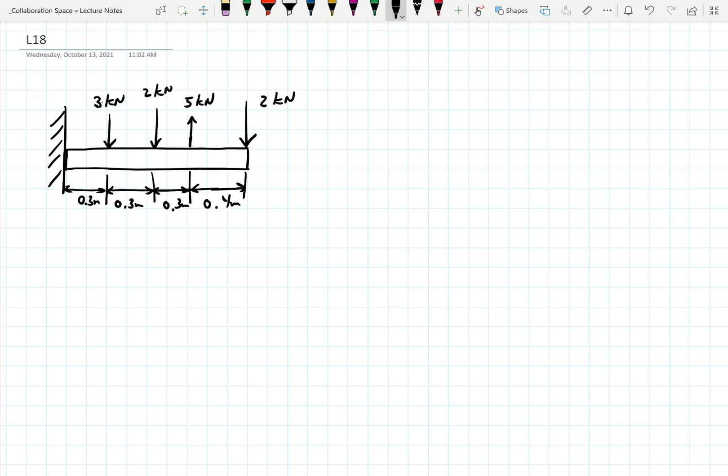Okay, we got A, C, D, E, and B. It's kind of a strange labeling system, but it's the way this particular problem laid out. When you do these in the real world, you can choose your lettering system, and I would always go left to right. Just A, B, C, D, E, and get to the end of it. Make sense? But we'll go with that.

But it is a good idea to put labels on this thing, because as we start doing these things, we come up with shear and bending moment diagrams. It's going to be interesting to keep track of all this stuff. Okay. All right, so that's the diagram for this. And what we want to do is draw

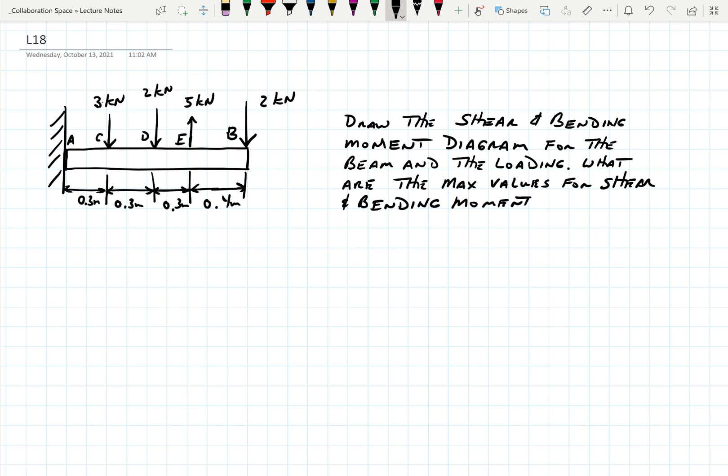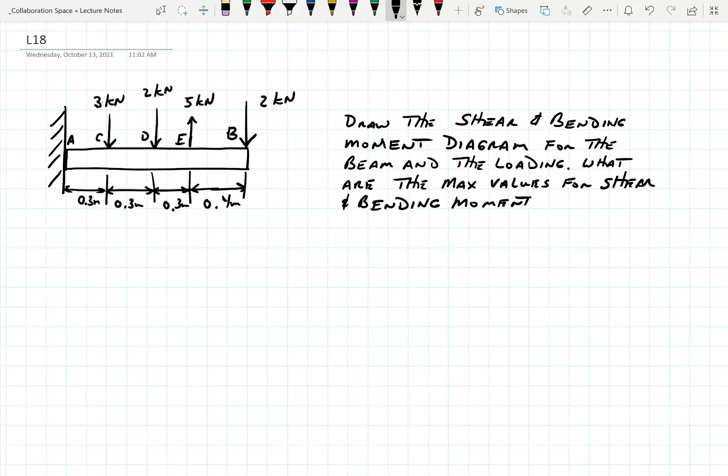Step number 1. What is it? Okay. So this is relatively simple from the standpoint of draw a line, put the forces in, okay? And what's next to this thing? We need a reaction here at A, don't we? Okay. So, FBD. Next thing is let's figure out what the reaction is, right?

And if I assume up is positive, that leaves me RA minus 3 kilonewtons minus 2 kilonewtons plus 5 kilonewtons minus 2 kilonewtons. Yes?

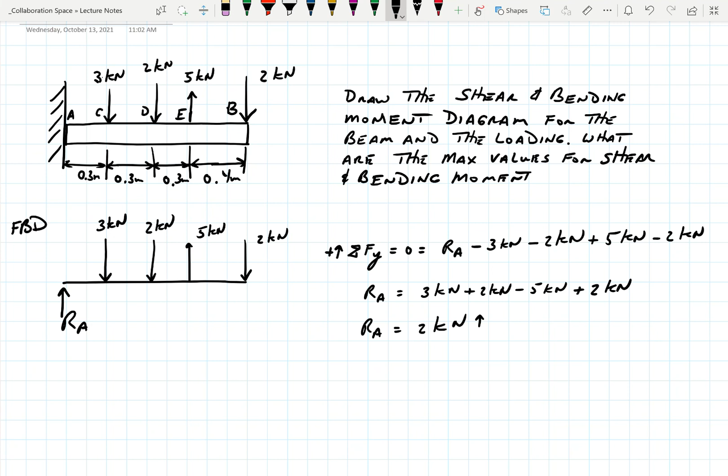All right. Now, there's one more piece to this that we need to figure out, and it's going to be how do we keep this thing from causing any other problems. We're going to need it down the road, and I can introduce it now or later. No, I think I'll introduce it later. We'll do it when we get down to the moment stuff. All right, so the next piece of this puzzle is

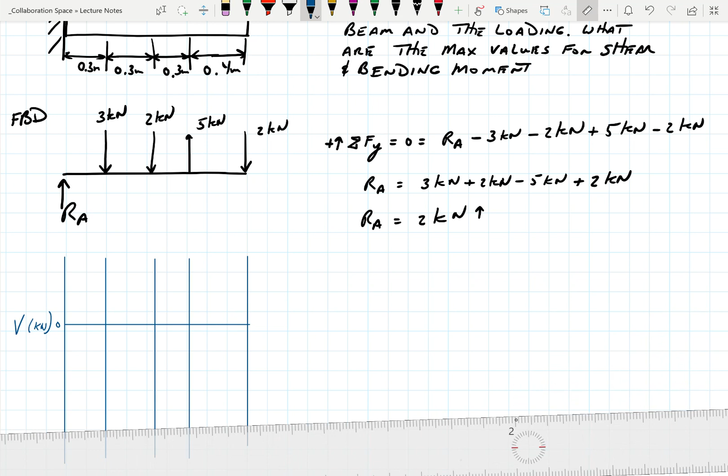oh, how big does this diagram turn out to be? We can live with it right about there. Okay. All right, so our shear and its units are kilonewtons. And that's 0, by the way. All right. Over to you for a minute. All right, so the shear section.

We're looking for the forces that are going to cut things off, okay? So really, the first thing for the shear here is V at A is equal to RA, right? Which is equal to 2 kilonewtons. And if I was smart, I would have drawn, let's do that again. Let's do the line at one of the regular lines here, and then we can actually have some fun with this. So we'll make that 1 kilonewton, we'll make that 2 kilonewtons. So the first thing I got to do is go up 2, right? All right.

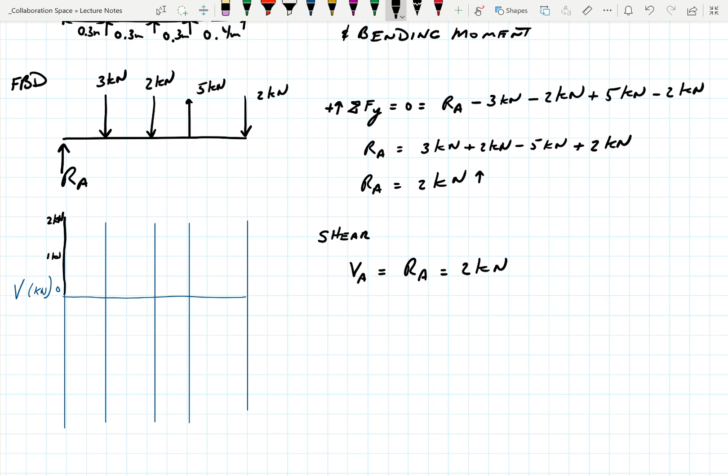So if I'm plotting the shear, that's the only force until I hit the one at, oh, it'd be nice to put the letters in there, wouldn't it? Just to make sure I used them right. A, C, D, E, and B. So the 2,000 newtons upward is steady all the way until what point? C, who said it? Don't be bashful. Is it just at C, just before C, or just after C? C. But I'm asking you to think about this. As it approaches C, what's it going to be just before C? Remember?

So it's actually going to shear at C, but up to C, just before it approaches there, it's still 2 kilonewtons, correct? Are you seeing that? If you don't understand that, what I'm going to draw in about 30 seconds is not going to help you. It's still 2,000 newtons all the way across this first 0.3 meters, okay? So it goes right there.

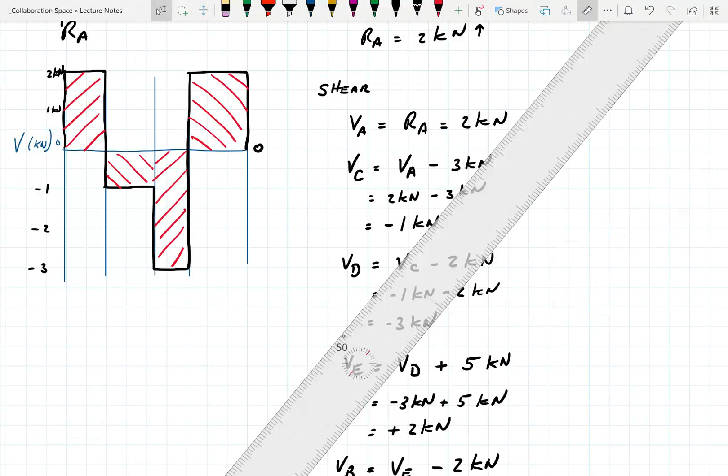All right, we're going to call that 0, and what am I going to do this in terms of? 0.2, 0.4, 0.6, 0.8. Negative 0.2, negative 0.4, negative 0.6, negative 0.8. All right, and you can choose whatever units you really want to play with there. All right, so now for the moment diagram.

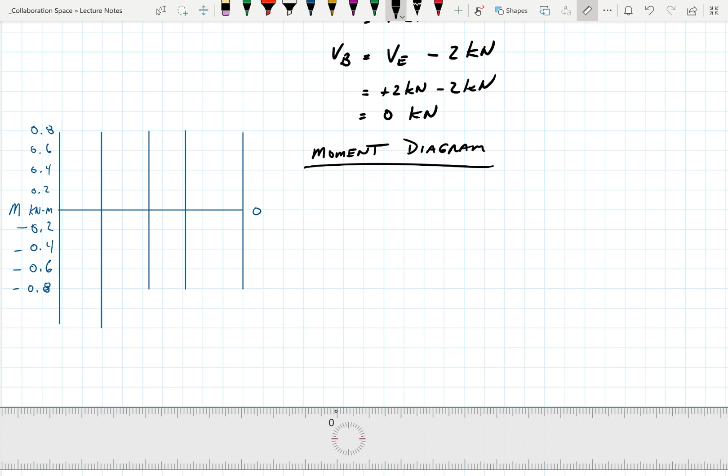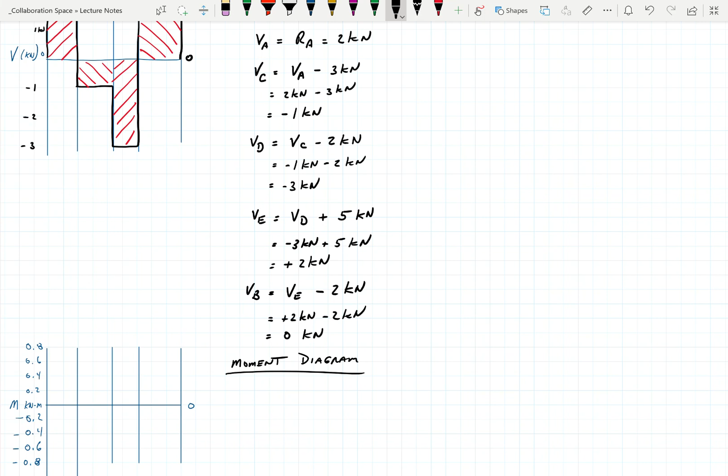Okay. And to do this, we kind of need the stuff from up here. And this is why the calculations tend to start going this way. The only other way I could do it on here was if I started running the moment equations over to the right here. But you're going to have to keep it somewhat on a page of paper. So put the diagram all on the first page, put all the equations on page 2, however you can make this sort out, okay? All right, so the area for the first one is really going to be 2 kilonewtons times 0.3, all right?

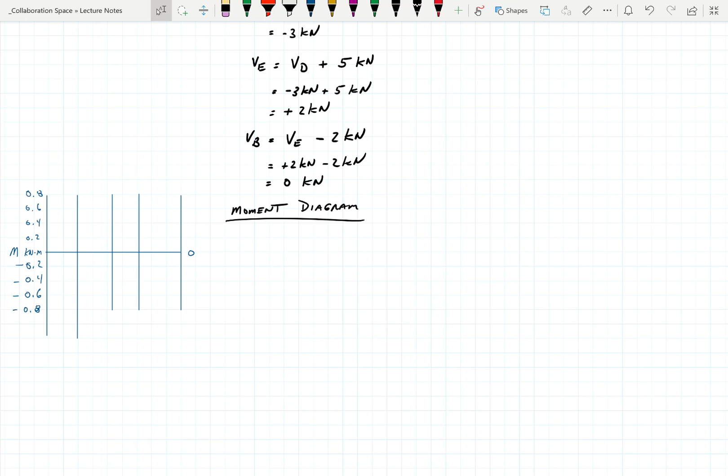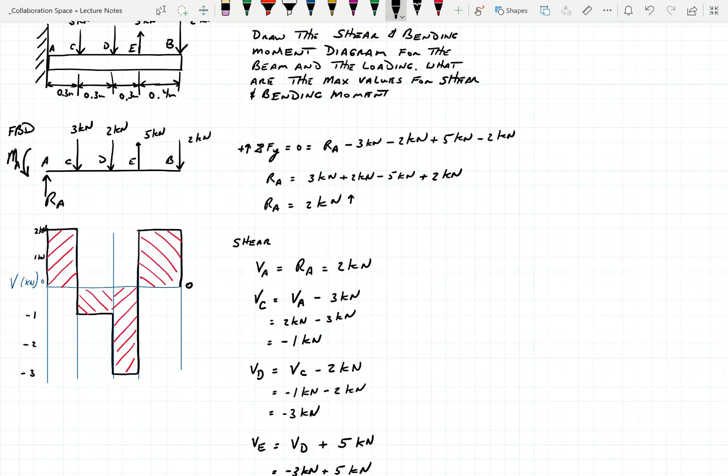Now, I've got to go back here. This is what I was going to introduce earlier. Let me slide all the way up to here. So that was my vertical sum of the forces reactions, okay? But in order to keep this thing in space properly, we need a reaction on this. That's this. Okay, so we need a moment at A that actually keeps this thing attached to the wall. Okay?

Now, strange concept to you, maybe? I'm hoping. What's that? Oh, you're using it so that we can actually figure out all the pieces and parts. So the free-body diagram up there is going to give us all the reactions that happen. Okay. Now, that beam in itself, if it was in outer space, will it stay level? He was shaking his head no, but I think we're heading in the same place.

But right now, just the beam itself, where'd my ruler go? If that thing is sitting there, okay, and it wasn't attached to the wall, would it just stay level with those forces? No. Okay, why not?

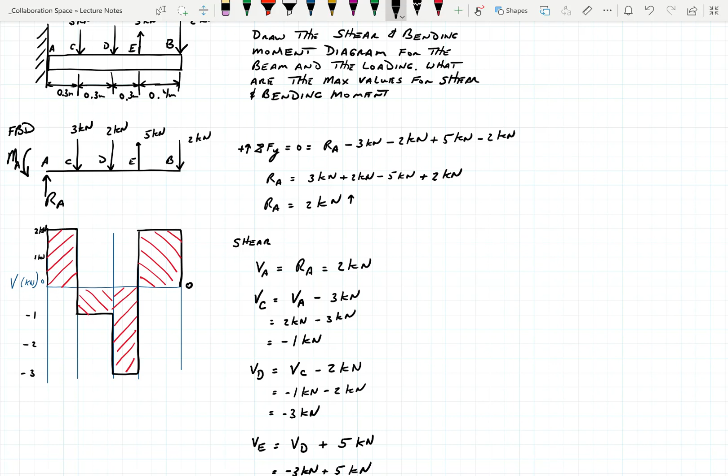Okay? We've got to come up with this moment out here first. Unlike a typical beam that we're using for like a bridge, there isn't one of those on a bridge because it's not doing anything to stay in that position. It can go this way or this way, and it all just sits there by weight. But we're going to hang this off the wall. I need something here. So I do have to figure out what MA is. So when I did the sum of the forces here, I really need to come over here and do sum of the moments.

In order to do that, do you remember that from statics? Yeah, okay. So we take our first one, our MA, and which way do I want to go? We'll make that positive, so it's counterclockwise. So MA, I drew it in that direction, so that's positive. But the force at C is 3 kilonewtons, and it's at 0.3 meters, okay? And I chose negative, why?

The force is going downward, but which way is it going to try and rotate? Counter or clockwise? It'll rotate clockwise. Okay, so that's a negative. 2 becomes a negative also because it's going to rotate there, but now we're at 0.6 meters. All right. And now we're at 5 at point E, and that's counterclockwise with the direction of moment. So that'll be 5 kilonewtons

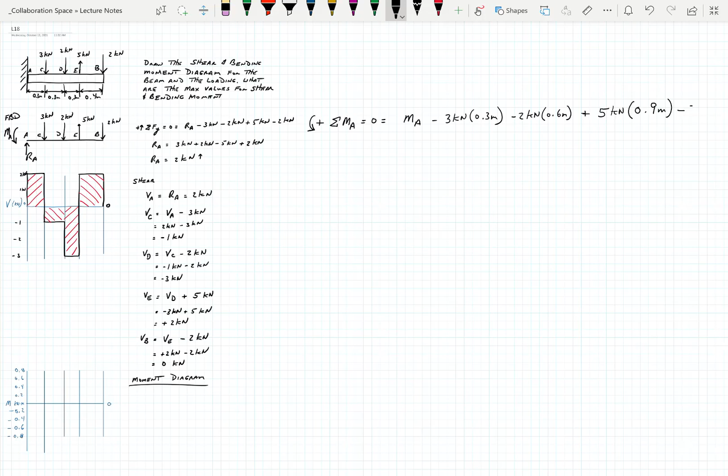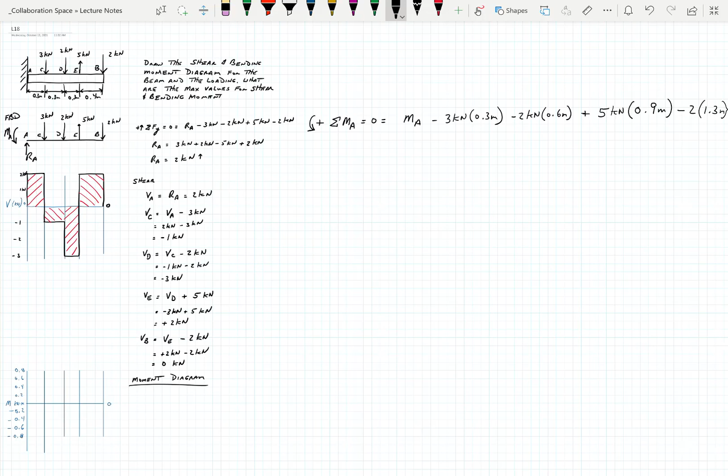times 0.9, 0.9 meters. And the last one is a negative 2, and that is at 9 and 4 is 13, correct? So 1.3 meters. Everybody okay there? I'm going to zoom in on just this section here so everybody can see it better.

All right, so we just algebraically solve for MA. Move MA to the left. Change all the signs, which, if I chose the other way, I could have eliminated all that. But we are plus 3 kilonewtons times 0.3 plus 2 kilonewtons times 0.6 meters, minus 5 kilonewtons times 0.9 meters, plus 2 kilonewtons, I forgot the kilonewtons up there, times 1.3 meters.

Okay, and we get all done. We got an MA that should come out to be 0.2 kilonewton meters. And it is going in that direction, so counterclockwise. Everybody with me so far?